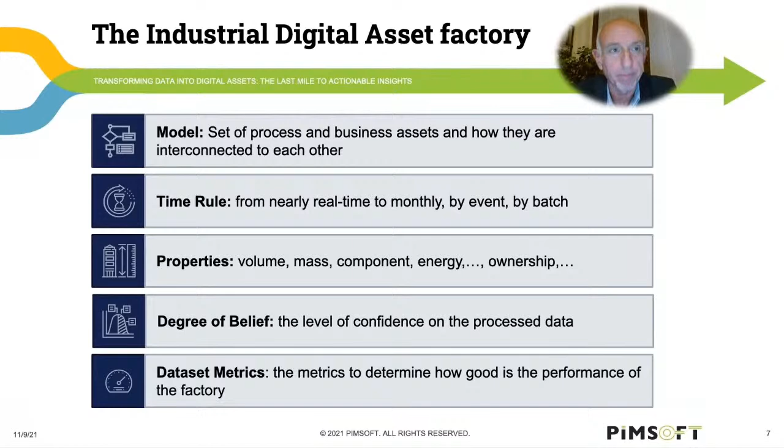Such metrics are defining how good is the performance of the factory itself. Our factory performs a set of dataset operations which transform raw data into a trustable industrial dataset.

Some of those operations are quite simple and intuitive, like filtering the data or identifying gross errors or validating the data against certain rules and criteria.

Then we would like to implement certain rules to substitute bad data with alternate values using design data or using historical data. The resultant dataset will then be reconciled according to the physical constraint based on the selected properties.

We may want to reconcile based on mass or energy, and we may want to apply such constraint to different envelopes. And the result of data reconciliation will be to obtain a first dataset closing the balance across the envelopes we selected.

Thanks to data reconciliation, we can even infer data it was not possible to measure because of lack of instrumentation on the field.

And finally, based on the reconciled dataset, we may want to apply tracking capabilities to track properties like composition or, as we said, ownership. The execution of the data transformation steps around the model generates over time the sequence of industrial datasets together with their metrics.

This is what has been defined as the single version of the truth, but we prefer to refer to it as the system of record of the company, embedding the accurate description of the properties related to the company assets over time.

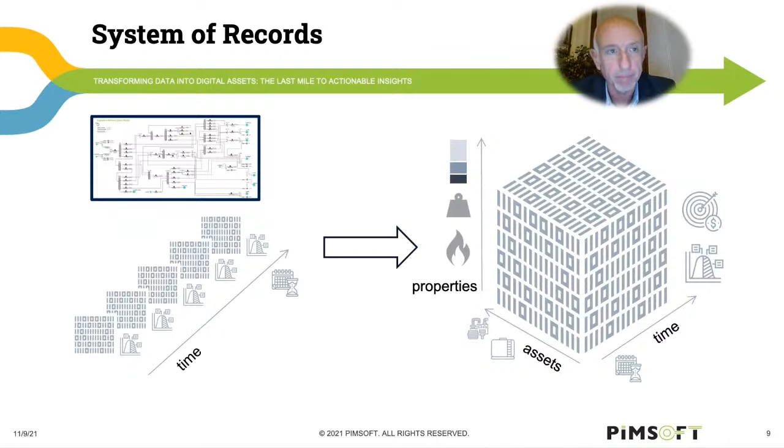The last step of the data transformation journey is about shaping data. Most consumers will not be able to digest the dataset as it is, so our factory needs to be able to shape and augment the dataset in order to be consumed by different actors.

Many scenarios see Sigmafine feeding finance with generated production and consumption data to move ERP stocks, sending reconciled yield vectors back to the planning and scheduling department, preparing compliance reports for tax and environmental authorities, and reshaping the dataset in order to feed the advanced analytics and machine learning layer with trustable data for better prediction.

In all cases, it is extremely relevant to provide the metrics certifying that the dataset we are delivering is good enough to be considered trustable.

Being able to measure the industrial dataset means to be able to certify the reliability of the data delivered to the different consumers. It is also a means to keep our digital asset factory under control.

Sigmafine produces a certain set of indicators, some of them at model level, others related to the points of measurement and the points of balance within the model itself.

They are segmenting the performance of the factory across different perspectives, like redundancy, correction, tolerance, solvability. We would like to take the opportunity to encourage the Sigmafine community to use those indicators more and more.

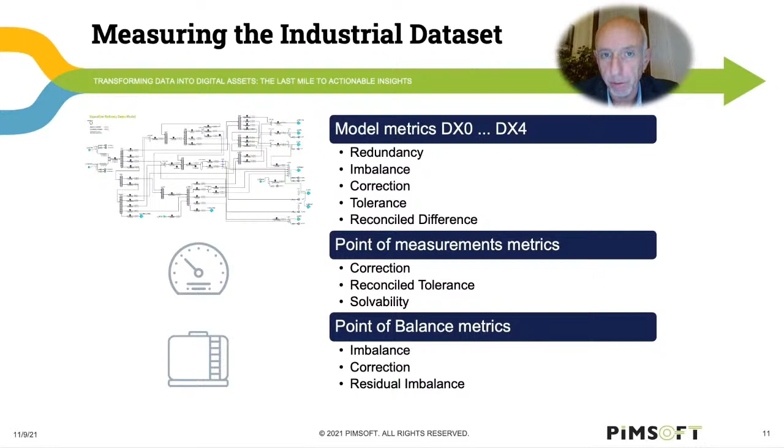As we'll see, these metrics are the ones you can use to build the trust between the factory and the dataset consumers and within the factory itself.

The first example of usage of model metrics is from MOL. MOL is an integrated oil and gas corporation. They are tracking and historicizing the Sigmafine generated model metrics to their PI system.

In such a way, they can track historical performance of their industrial dataset factory, and they can assess how modification to the model or improvement in the measurement system can impact the performance of the model itself.

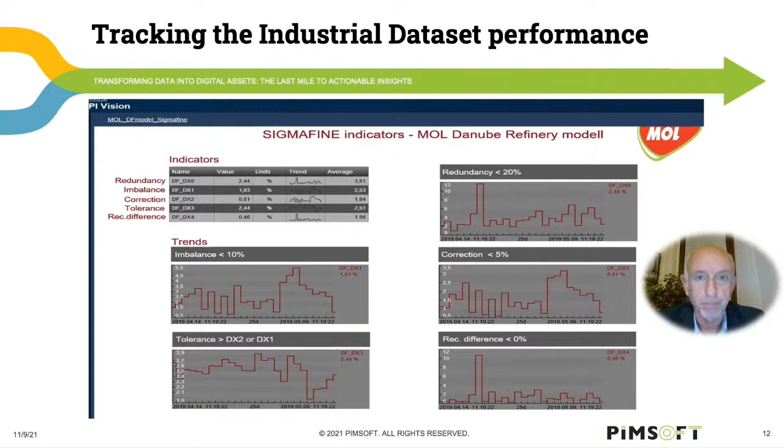So we have discussed how to manage and measure industrial digital assets. Now we'll go through monetization.

Infonomics defines monetization according to two main categories, indirect and direct. Indirect monetization refers to the internal usage of digital assets in order to drive better business, process, and organizational decision-making, which ultimately drive better economics.

This could be the case of advanced analytics optimizing certain production processes based on reliable datasets. Direct monetization instead refers to the exchange of digital assets with external entity consumers, with the objective to obtain an economic return or to avoid a financial loss.

But let's map this concept to the industrial digital asset context. With regards to external monetization, we have several cases where Sigmafine-generated datasets are used in the relationship with third parties.

This is done, for example, in compliance, whenever validated datasets are required by tax and environmental authorities. In joint venture, instead, it is required to allocate consumption and production among the different players of the joint venture. So this is the case where ownership tracking is used.

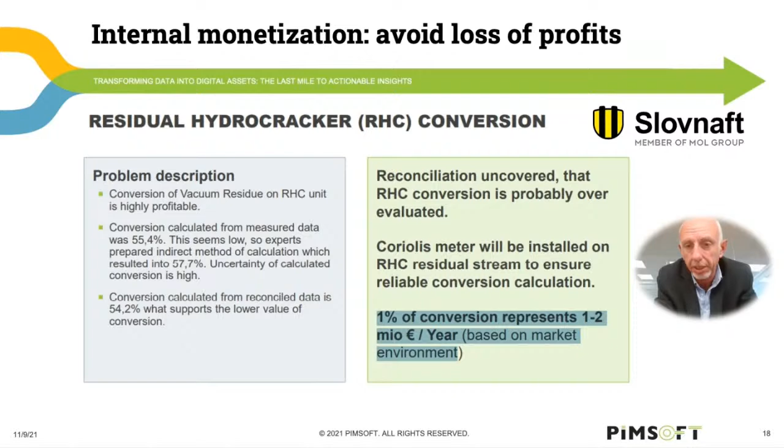And this is a clear case of Sigmafine having helped the company avoid a continuous loss of profit, because 1% of conversion calculated based on the market price would mean 1-2 million per year for the refinery.

We went through the process of managing, measuring, and monetizing industrial digital assets. At Pimsoft, we believe SigmafineHub is the foundation to elevate such process to be a well-controlled industrial dataset factory.

Among the different system capabilities added by SigmafineHub, I would like to underline the ones I believe are the most impacting. First of all, SigmafineHub introduces the capability to augment the knowledge of the system itself. It is possible, therefore, to add specific rules and behaviors to build a shared company data management practice.

Second, we learn from our customer that

Ryan, I guess that the video ended before the end, so we missed a few slides.

So, while Ryan is trying to recover this, let's continue the discussion. I think you're making the point that today everybody is looking for advanced analytics, but at the same time, they're suffering from a lack of organization and data quality. How do you position Sigmafine and the role of Pimsoft and its partners in that journey of our customers?

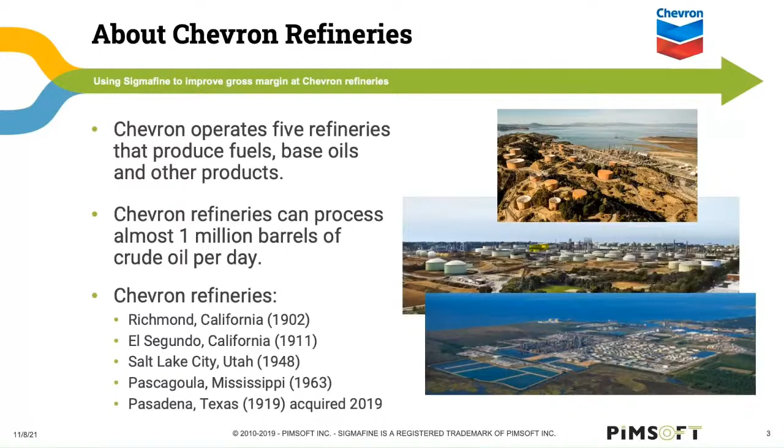Our first refinery was built in Richmond, California in 1902. Our second in El Segundo, California in 1911. In 1948, we built the Salt Lake City, Utah refinery. In 1963, the Pascagoula refinery was built, and that is currently Chevron's largest refinery in the U.S. Then recently, we acquired in 2019 the Pasadena refinery in Texas, originally built in 1919.

So Chevron's journey with Sigmafine started over 20 years ago. Prior to 2010, we had various independent projects. In Pascagoula around 2001, we initiated the Rambo project, which was the Refinery Accounting Mass Balance Optimization project. It was our initial Sigmafine deployment for Chevron. It also included implementation of the OSI products, the PI System and ProcessBook. Those were all installed, and the focus there was to replace our legacy inventory and yield accounting systems.

Later on in 2008, in El Segundo, we upgraded to Sigmafine 4.5. And then we also developed some software that served as the front end to Sigmafine. We called it Promise, which is Process Monitoring Information System. And then at the time, we had Pembroke Refinery in the United Kingdom. They had Aspen's Advisor that they were using for mass balance.

Then in 2011, we had the Global Manufacturing Mass Balance Project. This expanded the use of Sigmafine to all of the equity refineries. We started doing daily mass balances.

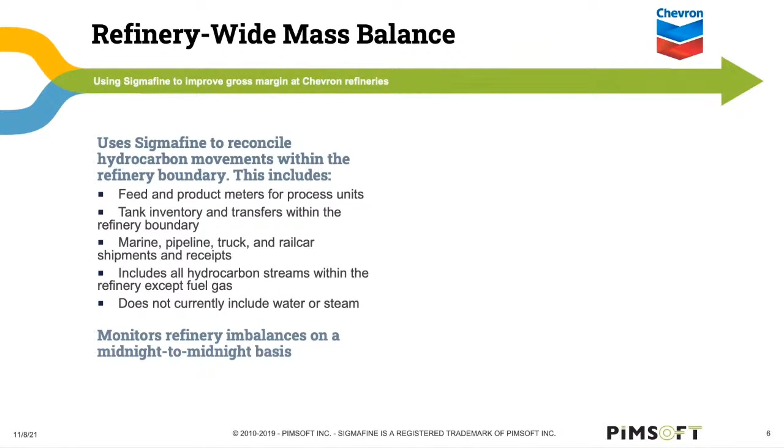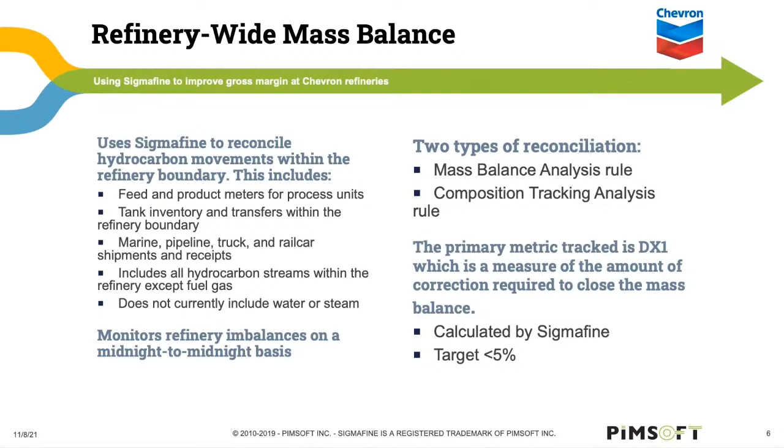We're monitoring refinery imbalances on a midnight to midnight basis, and we perform two types of reconciliation: the mass balance analysis rule, and composition tracking analysis for our crude tanks. The primary metric we track day-to-day is the DX1, which is calculated by Sigmafine, and we target less than 5% on a daily basis.

I wanted to talk to you about two of the projects currently in flight within Chevron: the Oils Movement Program and the Gross Margin Improvement Project. I'll start with the Oils Movement Program. I talked a little bit about this a couple of years ago at the Sigmafine Summit. The program is a collection of projects that include six work streams.

The first is tank field management, which covers internal refinery movements. Secondly is the marine movement and scheduling, which includes dock management and dock scheduling. The next work stream is rail and truck movements. We also looked at meter flow compensation, and then production accounting and mass balance.

The goal of the Oils Movement Program is to replace our obsolete marine scheduling, oils movement, mass balance, and production accounting systems. It's actually part of our digital transformation. The goal was to provide an integrated set of standard systems to meet all of our functional requirements while reducing the cost of ownership by using sustainable vendor solutions.

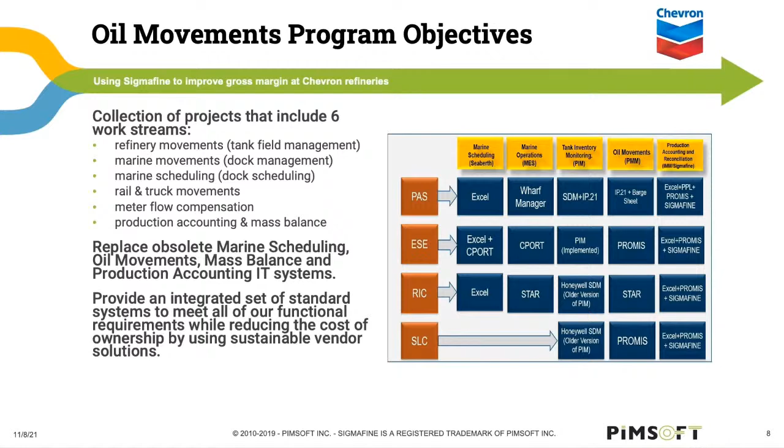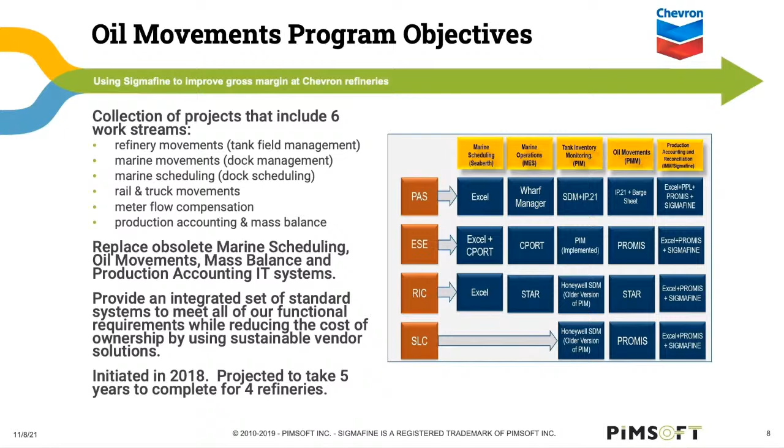As you can see in the diagram to the right, we had a variety of different applications at each site. We were using a collection of Excel spreadsheets and different applications from one site to the other, and some applications didn't integrate with other applications. So Oils Movement was really all about standardizing the applications and picking ones that would communicate well with one another, and that we had dependable vendors who could support those solutions.

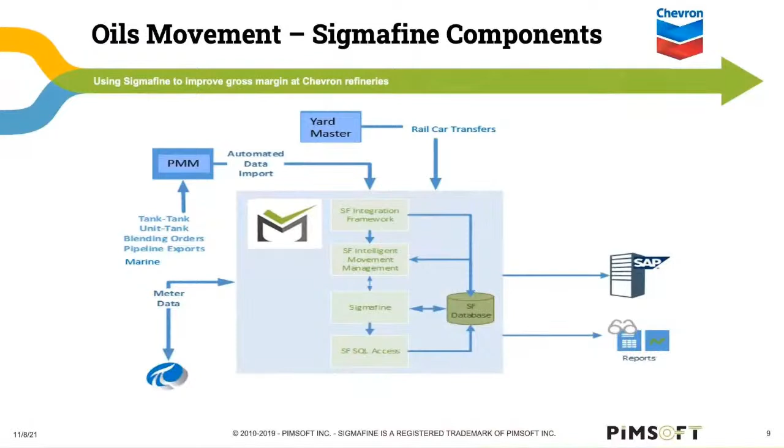Under the Oils Movement Program, as we started to study our infrastructure, we realized we were going to need a few more applications to fill the gap that PROMIS was going to leave when we decommissioned it. So a couple things we picked up: one was the Sigmafine integration framework, which we needed to connect to a variety of source systems, like Yardmaster for the rail cars. We had the Honeywell Profit Movements Management that was giving us all of our tank-to-tank, unit-tank, blending, pipeline and marine movements. That connects with MES to give the marine movements.

We also have our meter data coming in, and we're looking at an SAP integration to pull some truck information down from SAP. All of that is processed through the Sigmafine integration framework.

We are using at least a portion of the Intelligent Movement Management software to provide a tank calculator. Several of our users just needed to quickly calculate a volume from a gauge reading, so we put this in, using parts of Intelligent Movement Management to give them a web-based application to do a tank calculator.

And then through the integration framework, we were running our Sigmafine models. Under Oils Movement, we did have to update our models because they didn't have everything in there that was needed to produce a refinery stock balance for finance.

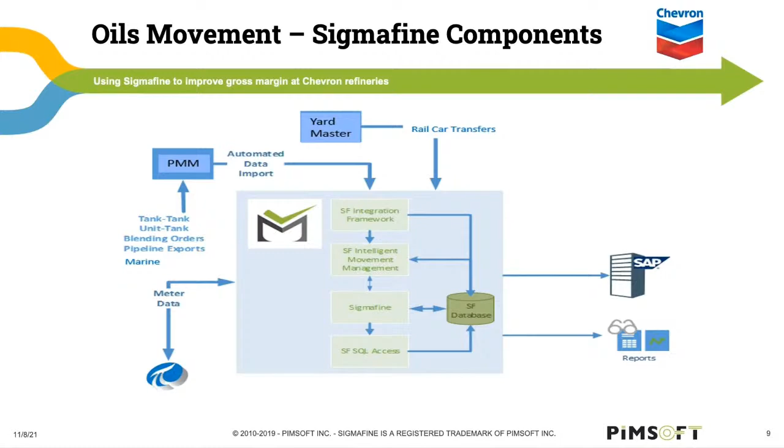On the back end, we needed to be able to report the results, so we needed the Sigmafine SQL access. We're writing to PI and to SQL using the Sigmafine SQL access. The information we write to PI is the reconciled mass and volume that comes out of the model, and everything in the model, including the tables and everything, goes into the SQL database, available for external reports.

We also have a backend integration for SAP. We needed to be able to send the monthly production numbers to SAP for gross margin calculations. The second project I wanted to talk about today is the Gross Margin Improvement Project.

This project was initiated in late 2019. However, due to the pandemic, much of the work had to be completed remotely. Although it was timed right, as a result of the pandemic lockdowns, the demand for refined products fell sharply, which led to negative margins for much of 2020.

In addition to that, Chevron cut nearly 15% of our workforce, so we had to learn quickly how to better utilize our resources and our technology. Gross margin was key to that. The objective was to move lagging and average processes to industry best practice so we could unlock additional gross margin at our refineries. There were two focus areas: planning improvement and performance monitoring.

Within the planning improvement section, we looked at feedstock selection, AOP, which is our annual operating plan, and price forecasting. Then under performance monitoring, we looked at material balance and monitoring, backcasting, and constraint management.

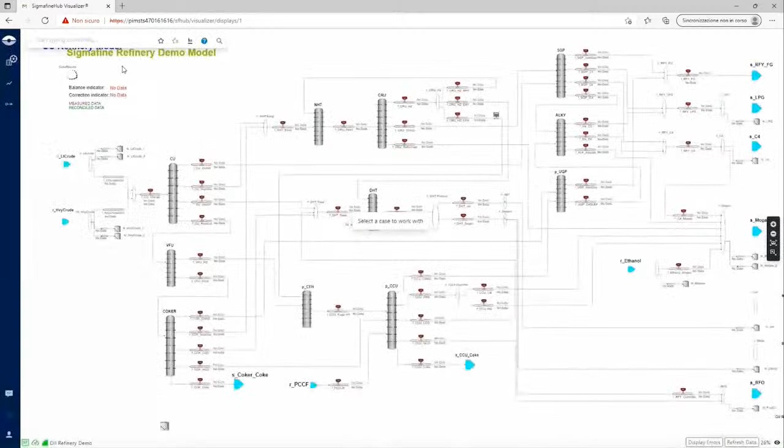With this demo, I'm going to show you some situations where the Sigmafine Studio web app really improves the way you look at your Sigmafine dataset. First of all, you can see that Sigmafine Studio is fully integrating the SigmafineHub, and results are accessible by other SigmafineHub web apps like Visualizer.

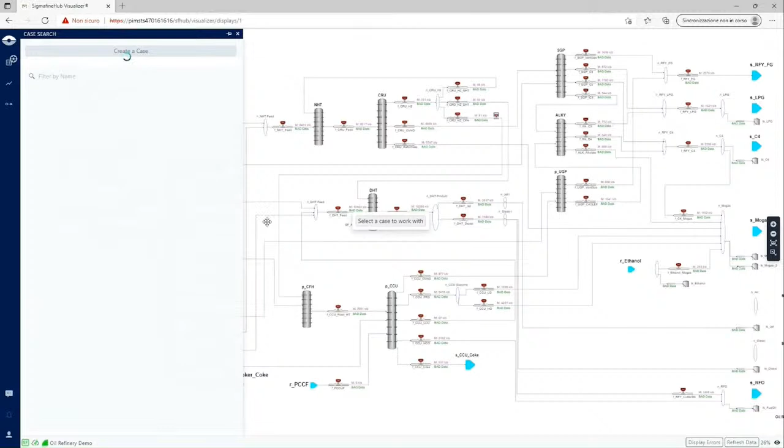So you can go with your daily Sigmafine activities, such as opening the display, selecting the case, and start analyzing the data. It is not new that Sigmafine provides a set of statistical indicators that helps you in analyzing your data for the diagnostic. But then you have to dedicate some time in realizing where the issue is, which data is missing, and most important, how to solve it.

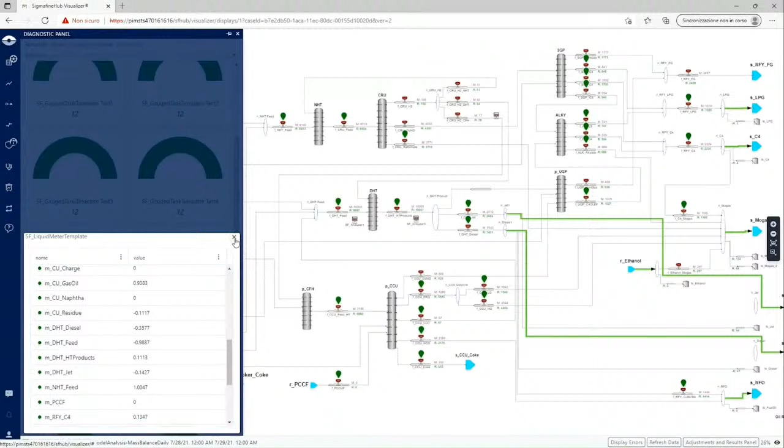Thanks to the Sigmafine Studio web app, you now have the power to develop some logic through the usage of the Studio Analytic that supports your manual routines during all the process of data validation.

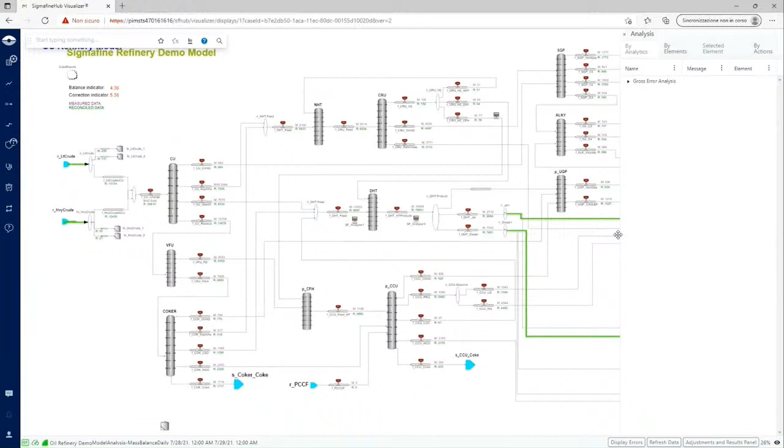Let's consider a very common situation that I'm pretty sure can sound familiar to you. It may happen that some measurements in your site, for many reasons, return 0 or bad data. Now, imagine how useful it can be to have an analytic that returns the list of these measurements along your model in a sort of interactive summary table, and then make a comparison with their values in the previous case, with no need to spend time closing the current case, opening the previous one, and manually searching for the values you are interested in.

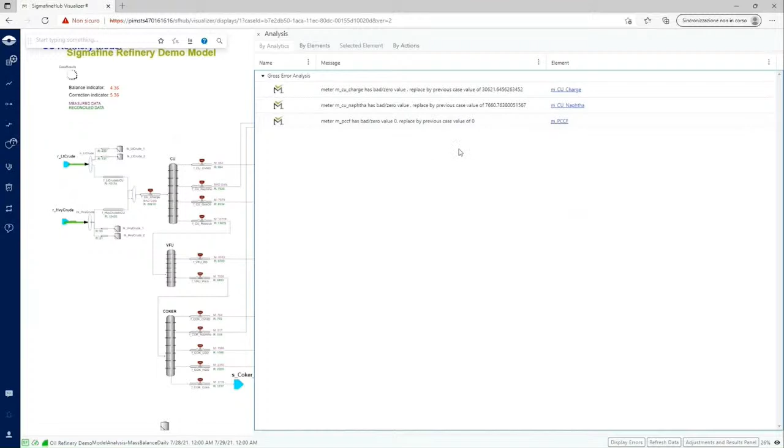Also, it would be incredibly advantageous to have some suggestions on the possible actions to take in order to solve the situation, for example by adjusting the current value with the previous. And you can easily decide which actions to apply or not.

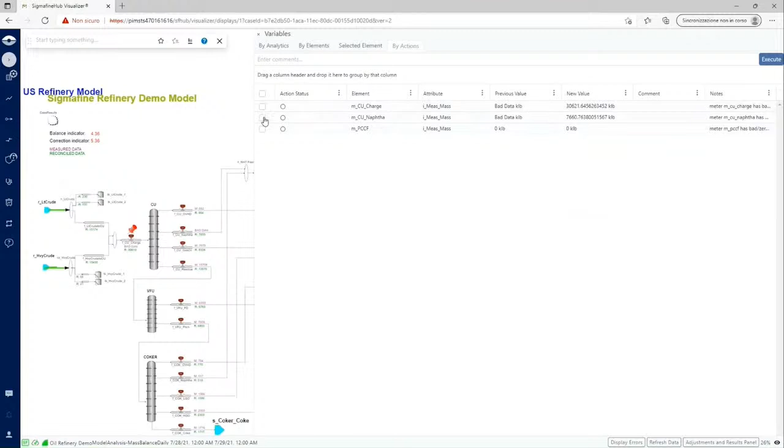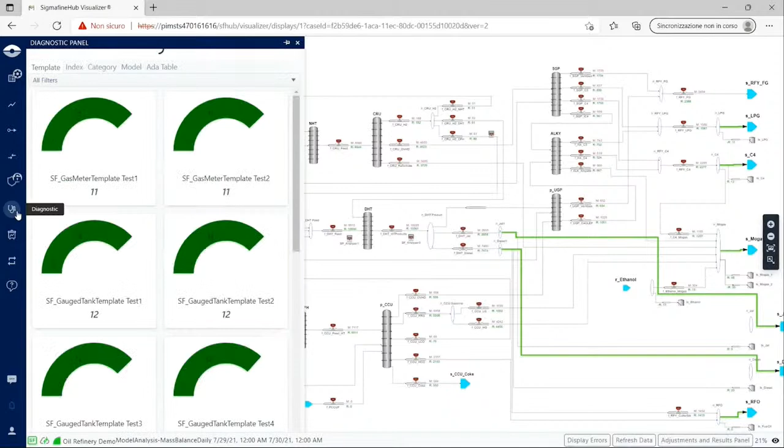Another common situation happens when you are analyzing your dataset and you notice a node, a tank, or process unit with a huge imbalance. You can start analyzing your data using the diagnostic panel inside the SigmafineHub, and here you have the overview of all the statistical indicators. You can see that there is already something related to the ethanol receipt area.

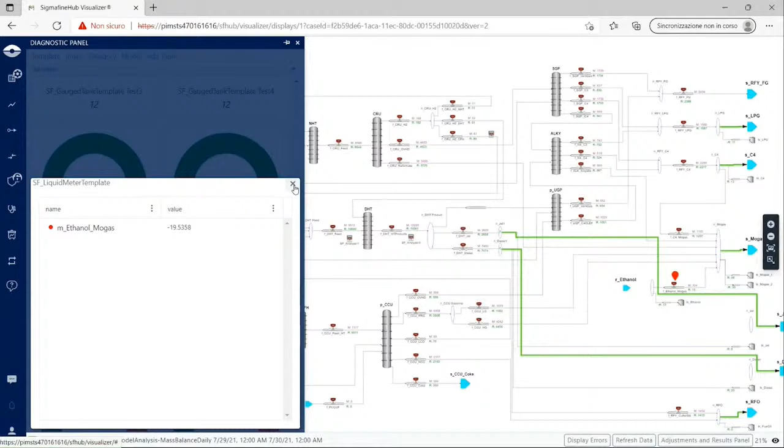The meter has a Test 1 value very high. This means that the correction applied by Sigmafine to the measured mass is very high with respect to the tolerance that you assign to your meter. As well, you can see the node has a Test 3 very high, together with Test 4. These two indicators inform the users that maybe there is a problem in this area.

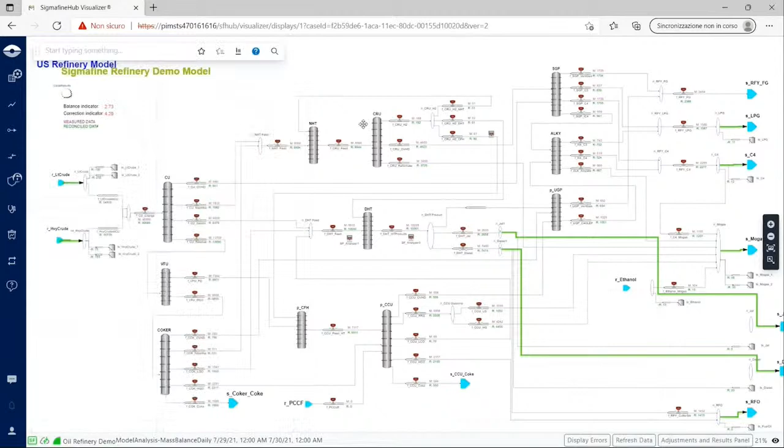With the SigmafineHub, you can easily identify imbalance points along your model, and you can also associate some suggestions.

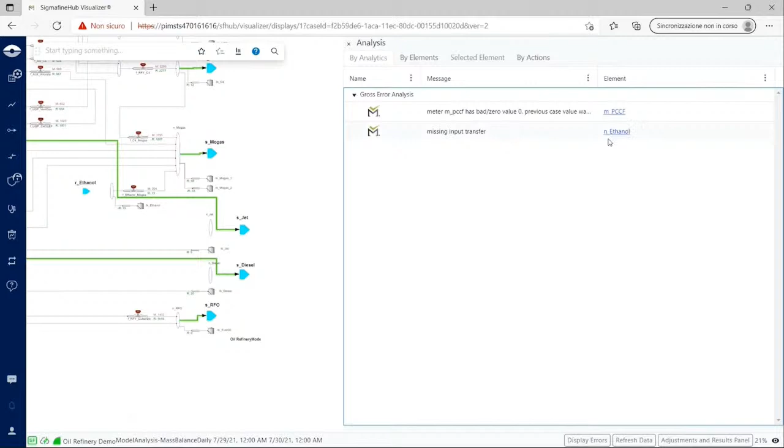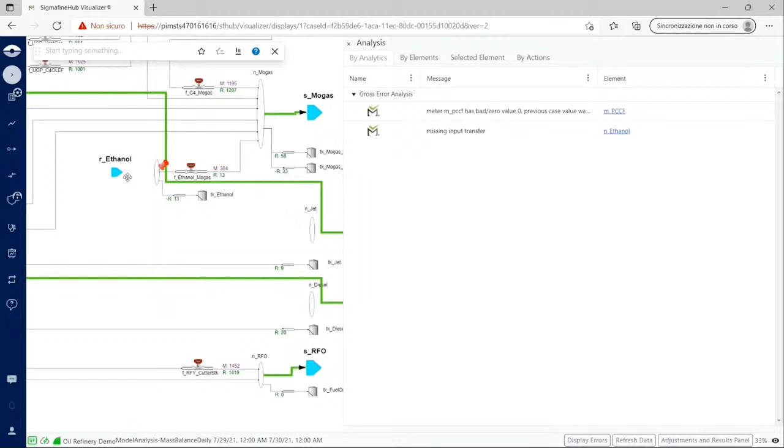So it tells you the node is imbalanced, and it also tells you that there is probably a missing input transfer. When you analyze the area, you notice that a transfer is missing from the receive point to the node. This information can significantly reduce the time you spend identifying the problem and the solution to adopt.

If you click, you can create your missing transfer, putting the source and destination. You can even add some attributes if you want, or just create it. Here it is, the new transfer is now available in the model. And now you can run your case again.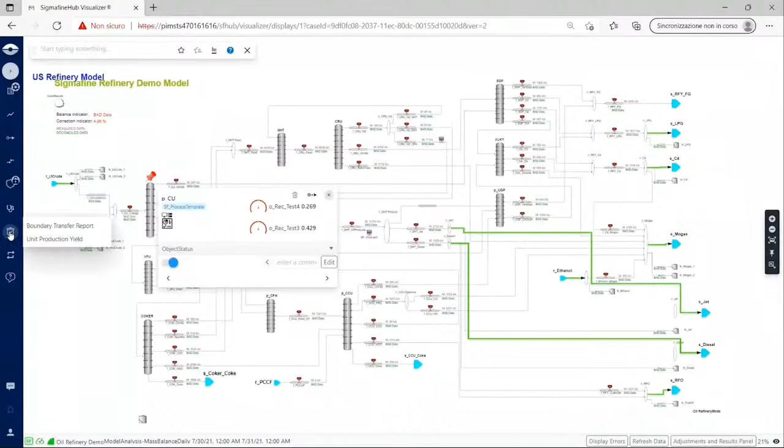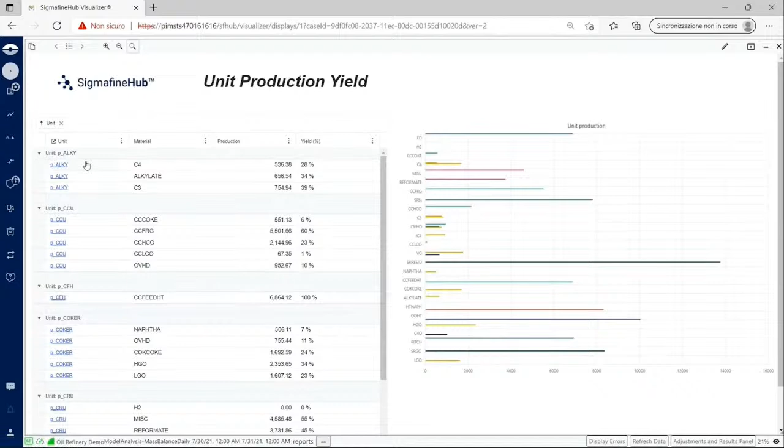In both tabular and graphical view, you can investigate the production yield per each unit simply by dragging and dropping the unit column, so you can see the material produced in terms of amount, quantity, and yield percentage, as well as the overall production per material in the graph, together with the process unit where it came from.

For example, you can easily check that the overhead production is done by three different process units with their respective quantities. You can access the same information from here by grouping by material and searching for the material you're interested in.

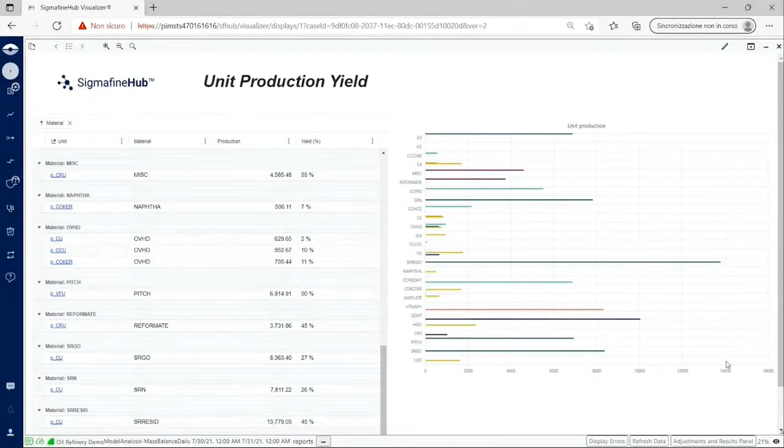Furthermore, you can decide to go into more detail for a single unit, select your desired unit, and then open a more detailed view.

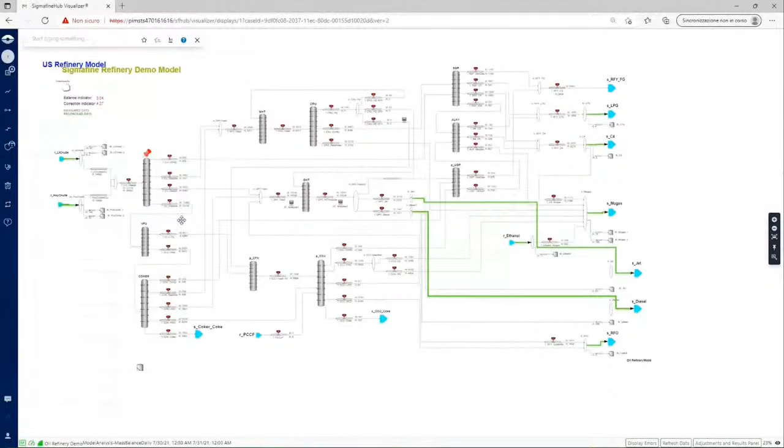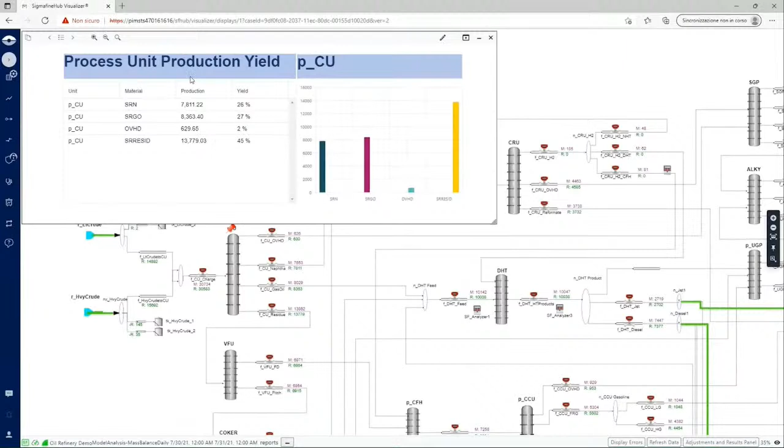If you want more detail on unit production yield, you can select the unit you're interested in and access the same information, but filtered only for that unit, so you can see in graphical and tabular view the yield of the crude unit, referring to the material produced by the unit, their quantity, and their yield in percentage.

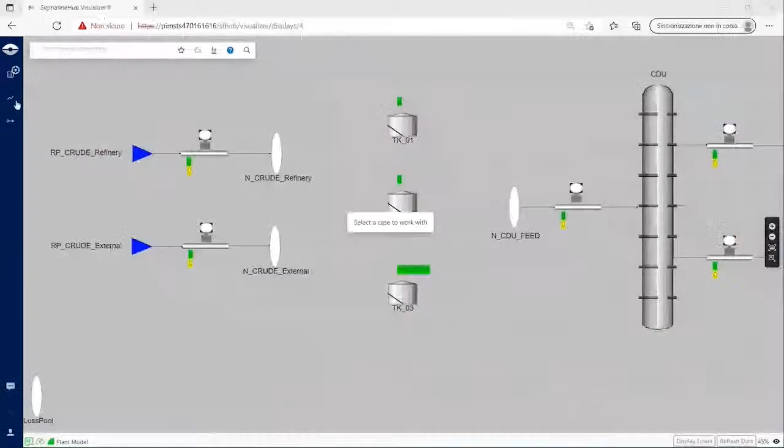Until now, I showed you examples for balance analysis. But the Sigmafine Studio supports even more advanced calculations. For instance, consider a composition tracking analysis that calculates the material composition of tanks, flows, and transfers based on their initial composition and the movements that happen during the analysis time frame.

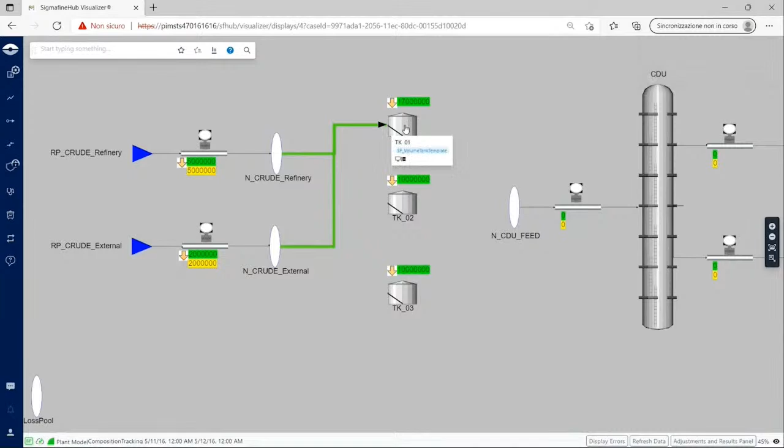Thanks to the Sigmafine Studio, you can create an effective way to visualize and analyze the composition data of an element, for example this tank, together with the material balance data within the same interactive dashboard, giving a complete overview of both balance and material composition, in terms of what enters the tank, the input transfers, and the material detail.

At the end, you can access all this information, and the composition tracking table results are visualized through a pie graph that updates according to the selected elements. For example, this movement entering the tank is made 100% of West Texas Sour. By clicking on the tank, you can access the composition tracking results table of the tank, and the pie graph is useful because any unexpected material will jump to the eye.

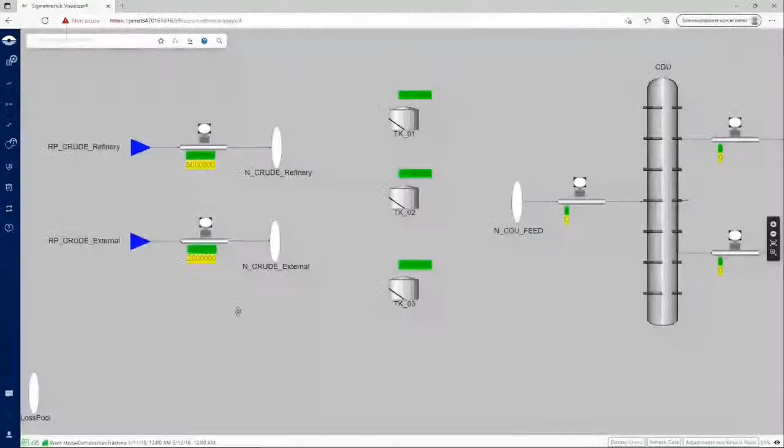You can also have a complete overview of all the materials stored in your model based on the composition tracking results.

You can see the material summary report that shows you in both tabular and graphical way. You can visualize all the material summary that you have with their respective quantity, the total amount that you have in the model, or also can be very useful to see the details of the materials by tank.

Tank 1, for example, is made of 3 materials: Arab Superlight, West Texas Sour, and West Texas Intermediate. In one click, you can visualize directly their quantity, respectively, with no need to select the attribute and expand the table of composition tracking results. Everything is directly reported here in the same SigmafineHub environment.

And finally, at the end, you can have the detail per each tank of the materials that you have stored. This is an interactive dashboard. As you can see, by clicking here, it tells you the same information in graphical view, and it automatically updates, giving you the data that you want to see.

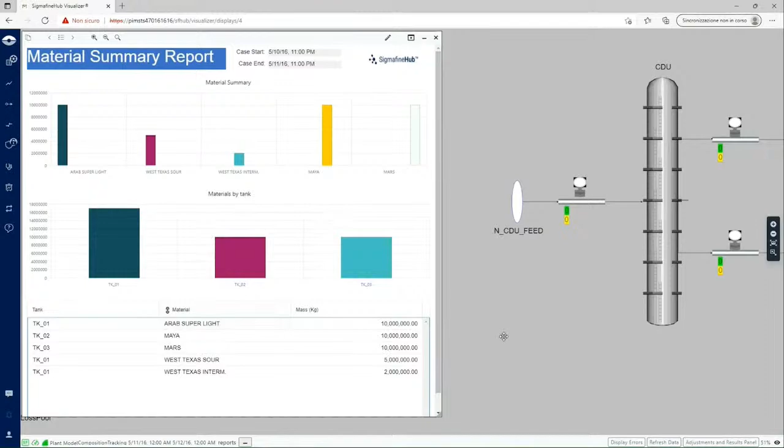It's really amazing what Sigmafine Studio is enabling. Elena showed us analytics that help users not only to root cause the problem, but even propose solutions. Interactive reports that provide insights on the assets and on the overall balance envelope. Dashboards that interpret complex datasets, such as contextualize the results of composition tracking. And everything available at your fingertips without stepping out of the visualizer so that you can immediately take actions. And that is really awesome.

But there is more. I'm pretty sure, whilst looking at the demo, that in your mind you were already thinking about what you could do if Studio were available in your Sigmafine environment right now.

Well, you could say, I could create the refinery loss report. I could see all the metal grades of each stockpile all at once. I could compare in one table the LNG production of all my trains. I could put intelligence to pre-validate the reconciliation before Sigmafine users even reach the office. You could really do cool things without stepping out of Sigmafine.

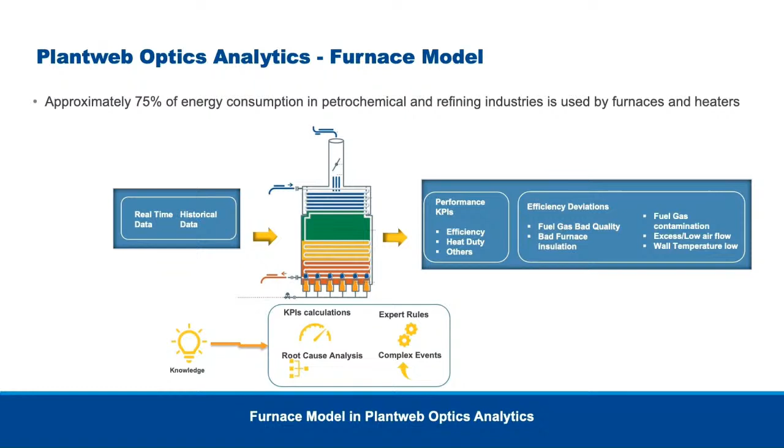In this use case, we worked on a fired heater. We made a model for it, which embeds years of expertise and process knowledge to preemptively alert operators about possible problems and prevent costly shutdowns. This model embedded performance calculations too, to identify performance targets and recurrent problems, and root cause analysis to help find and mitigate the impact of deviations.

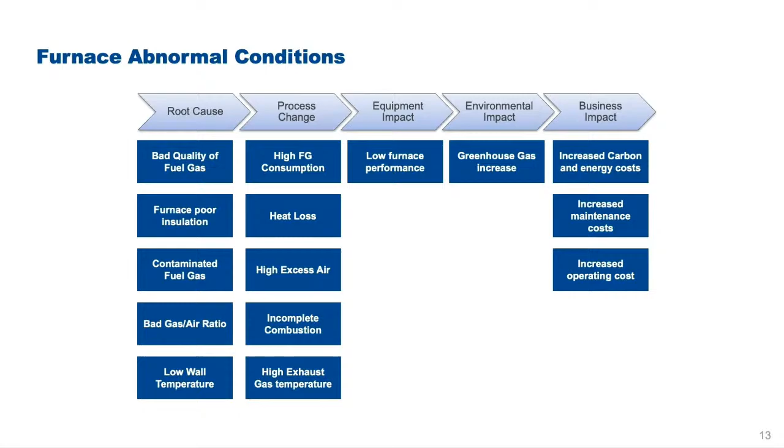As part of the model, we identified root causes for abnormal asset behavior. Also, we identified their impact on the equipment, environment, and business. The detection of abnormal behavior is mainly based on the raw data.

There are some challenges with the raw data that could be divided into two categories. The first one is measurement error. The measured data may be lost, contaminated by gross error, or distorted by random signals during the measurement process. So the final data displayed to the end user might deviate from the original data, which might affect decision making.

The second challenge is the lack of data. Sometimes we don't have enough instruments to generate the right KPI in the model, which might be caused by missing instruments on the field, and that needs to be compensated by estimation or process modeling. These two challenges may lead to wrong decisions.

The solution is to generate trustable data for the analysis through data reconciliation. This will bring considerable benefits like data correction, easier detection of measurement problems, and making effective decisions.

We partnered with Sigmafine because it increases confidence of what we measure and estimates what we don't measure, which helps us make better business decisions.

This is what we get when we integrate Sigmafine with our model. Now the raw data is flowing through Sigmafine and then fed into Optics Analytics model, which will deliver enhanced results, enabling the user to identify deviation from optimal mass balance, identify the cause of underperformance, and work toward corrective actions.

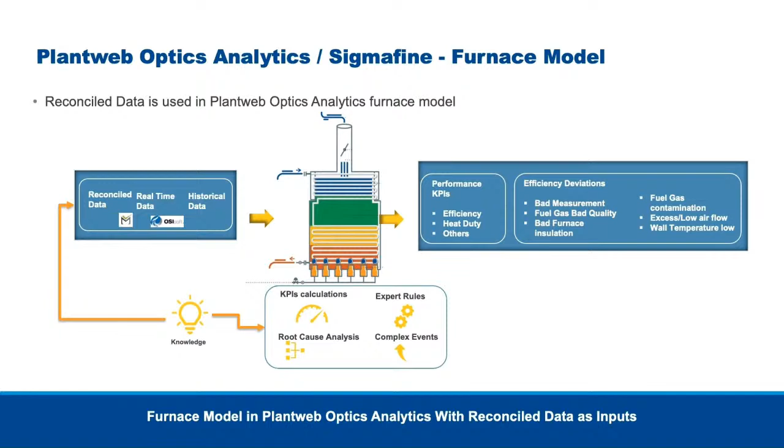So to start building the combined solution, we follow these steps. The first one is to create the model in Sigmafine. We start by building the furnace model, reconcile the data, and then estimate and measure its parameters.

Sigmafine uses the data reconciliation method, which uses a least squares formulation to quantify the error in the model measurements. Here we developed the furnace model in Sigmafine, which is empowered by a thermodynamics extension to do the hourly integrated mass and energy balance of the furnace.

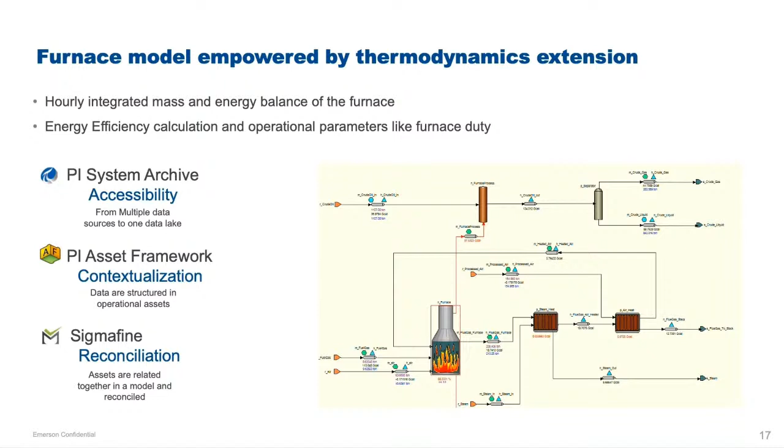Basically, we are reading the raw data from the PI data archive. The data were structured in operational assets with PI Asset Framework. After that, these assets are related together in a model and reconciled with the Sigmafine server.

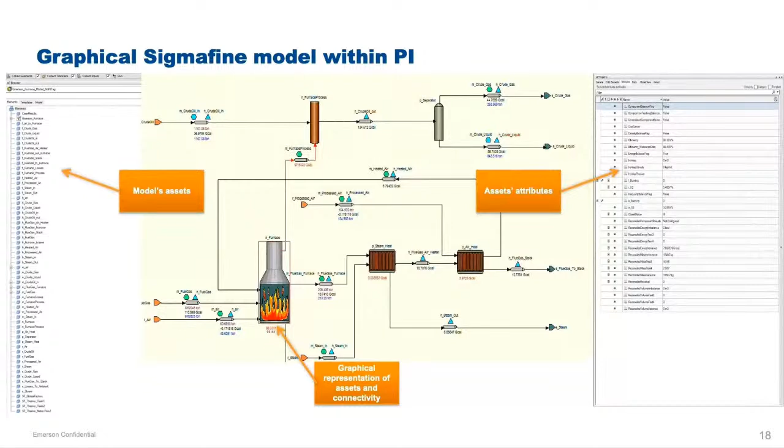So this is the Sigmafine furnace model. Each asset is represented by a standard Sigmafine template, which is represented in a modular display.

Now we will do the data mapping and integration between Sigmafine and Optics Analytics. Once we have generated the reconciled data, we identified the data we need from Sigmafine in the analytics model, and we mapped this data to the KPIs that we need to generate in analytics.

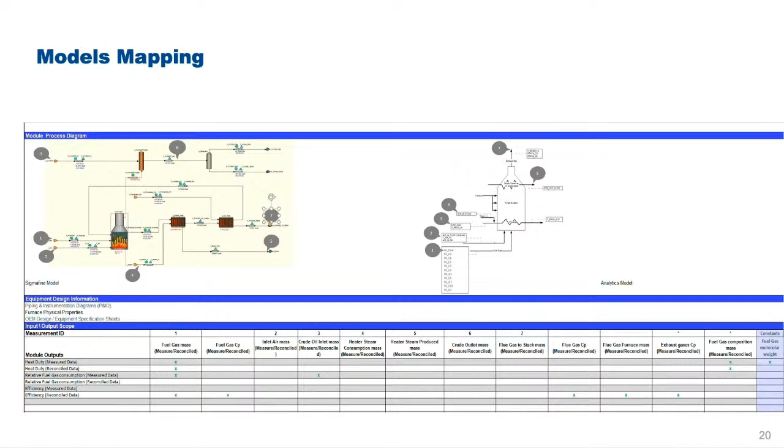Then, in order to integrate the two components, Sigmafine generates the reconciled data and publishes it to the Pi server. Then analytics connects to the Pi server and reads the reconciled data from there to generate KPIs.

The combined model is fed by real-time infrastructure with process data, and where required, with laboratory data. It provides seamless integration with the customer infrastructure, able to interface with disparate data sources and data repositories, such as historians, ERPs, and business intelligence tools.

So Sigmafine can either publish the reconciled data to SQL Server or Pi Data Archive server. The connection from Analytics to the SQL Server is very easy and simple. For the connection to the Pi server, we need to install and configure PyBridge to connect to Pi server. Once connected, the Pi variables will be transferred to Analytics as global variables.

Now we will create the model in Analytics. We started by adding a class. This class will embed calculations to calculate the asset performance.

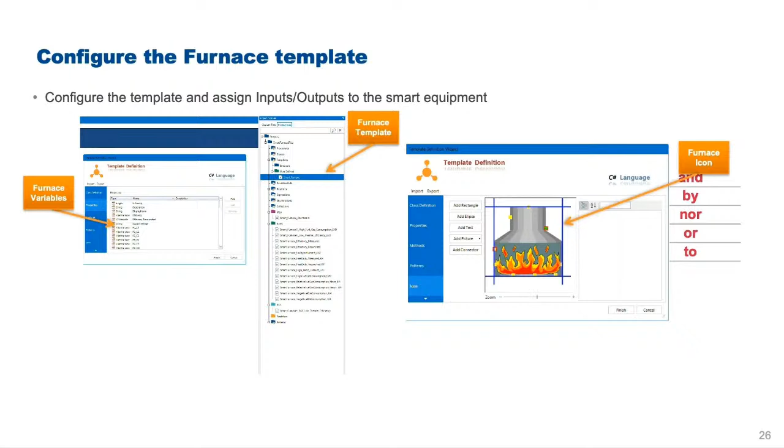This template determines KPIs and metrics. Then it compares the calculation to a baseline or design values to determine deviations, in order to identify potential instrument problems, pinpoint degradation source, and evaluate the effectiveness of cost improvement actions.

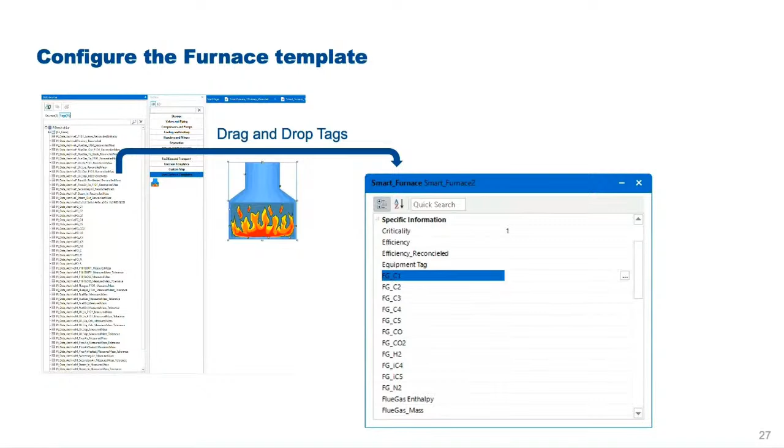The asset includes a set of properties, where each property is assigned to a tag from Sigmafine for the reconciled data, or from Pi for the raw data.

Now we will go to the KPI development. We use custom K rules to compute KPIs like efficiency and heat duty. As you can see, this model uses a graphical environment based on drag, drop, and connect.

After generating KPIs, we compared the calculation to a baseline or design to determine deviations and generate events accordingly. So the event here is generated when a low thermal efficiency is detected.

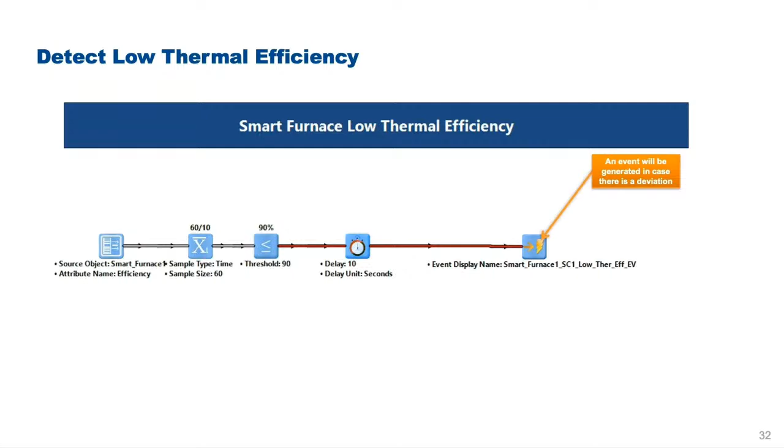Then we build a complex event graphical rule to determine root cause of the deviation. We used the KRCA model in Analytics, which allows creating fault propagation models that are defined by cause and effect relationship. The possible causes of an abnormal condition are located upstream, and the effects are located downstream.

For example, we detected a low thermal efficiency. The cause of this symptom is the instrument bad measurement. Behind this problem box, there is a logic that we define to trigger this problem when it occurs, like we saw previously.

This model provides also actionable knowledge for immediate resolution of performance gaps. These actions are associated with the problem box and displayed in dashboards. For example, a message will be displayed to check the instrument FIT 101. Moreover, using Sigmafine data, we can determine which instrument is causing the issue and which measurements are contributing most to

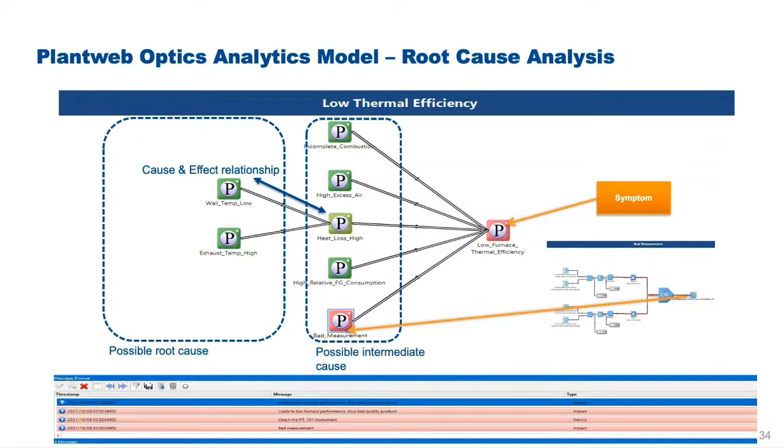the imbalance. In this way, the root cause analysis based on reconciled data can serve several purposes. First, it acts as an early warning system for instrument malfunctioning or drifting out of calibration. Second, it acts as an online validation process where the performance of individual instruments can be compared for consistency against the rest of the measurements in the system.

We can have more details about the low furnace performance by going into this icon. The low furnace efficiency symptom is associated with the bad measurement provided by instrument FIT 101.

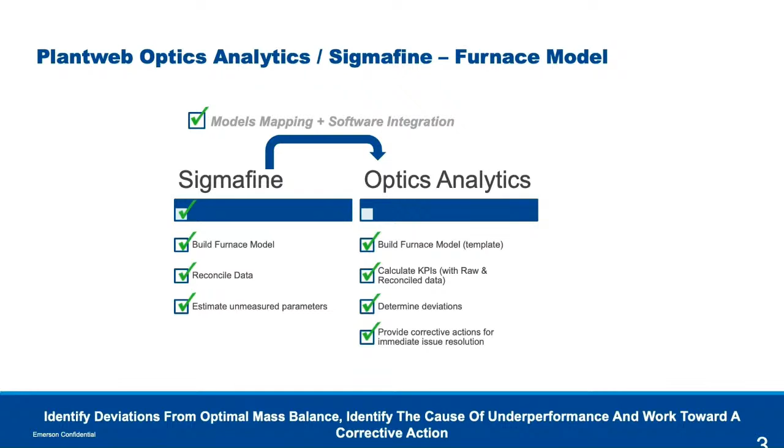So this is the summary overview with drill down capabilities. We were able to estimate the unmeasured data like flue gas to stack and the vaporized crude. Then we were able to calculate the KPIs based on raw data and reconciled data. Then with the root cause analysis based on reconciled value, we identified which instrument has potential problem and generated actions for immediate resolution of performance gaps.

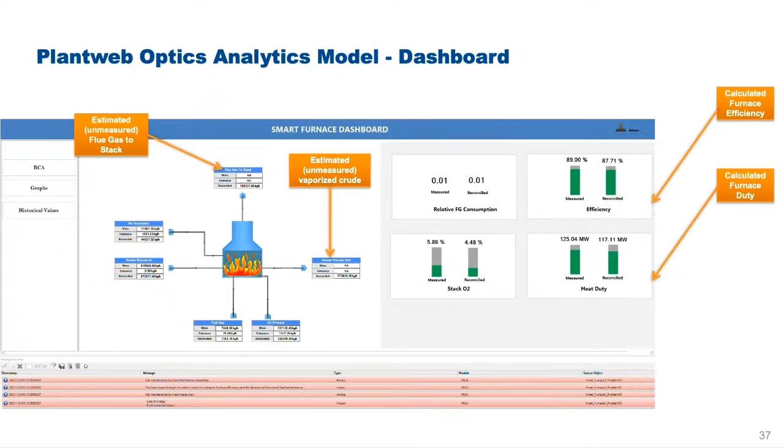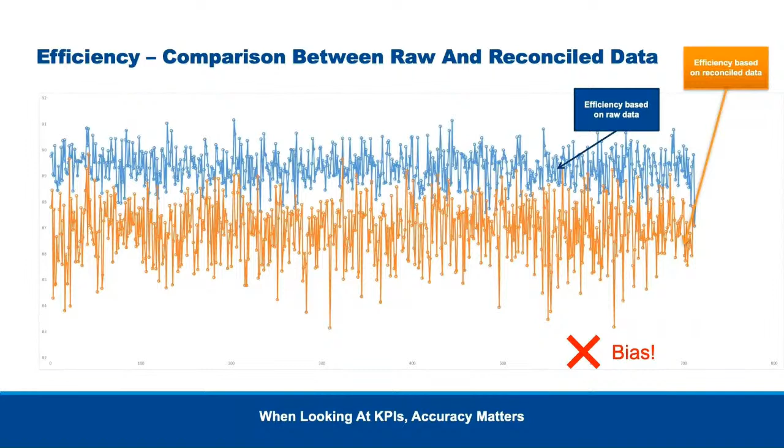This graph is a comparison between thermal efficiency calculations based on raw and reconciled data. As you can see, the efficiency is lower than expected. This bias between the performance indicators with reconciled and raw data is caused by bad measurements.

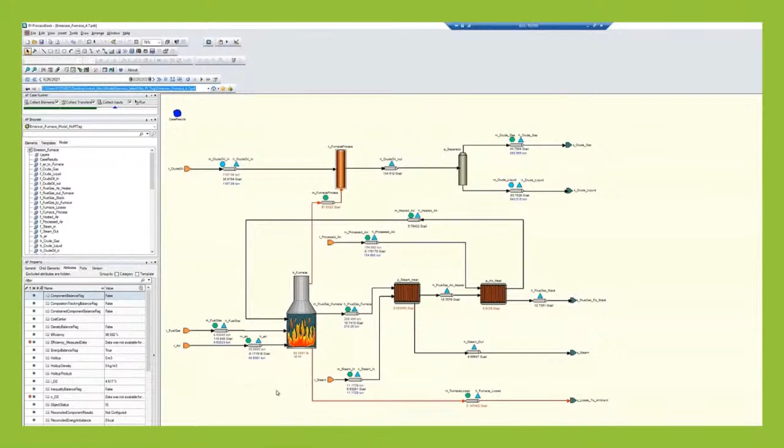As you can see, each asset is associated with an element template, and assets are related together in the model and reconciled. The reconciled data is then archived in the PI server.

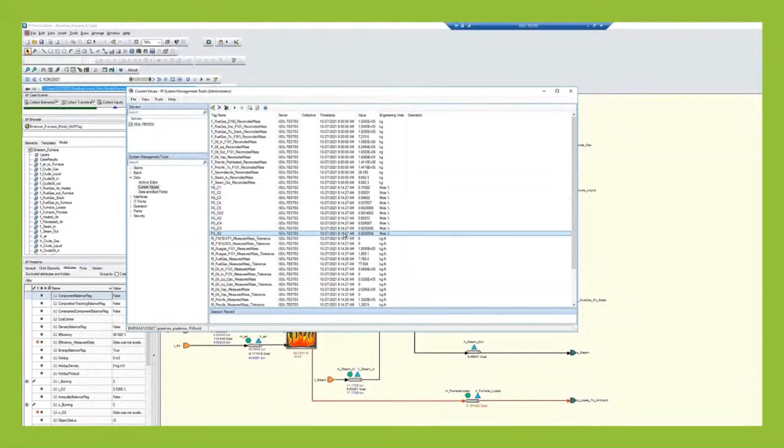This is the PI System Management tool that we can use to visualize the current value in the PI data archive of the reconciled data from Sigmafine. This data will feed then our analytics model.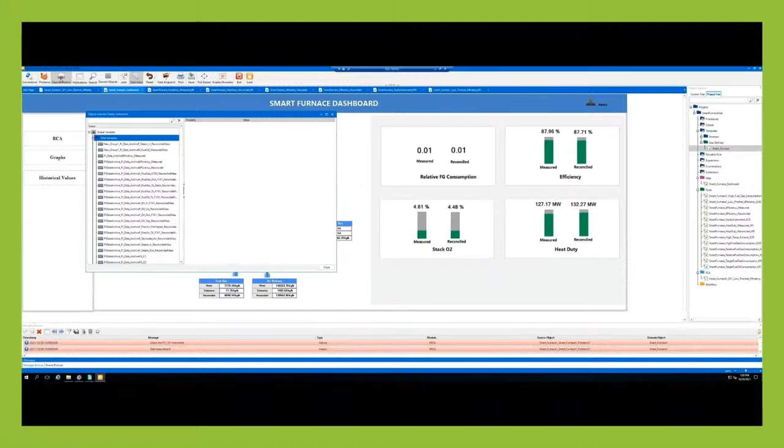From the object watcher, we can check the variable status and values in the system. This asset is a user-defined template, which has properties, and each property is associated with a variable that we are reading from the PI server.

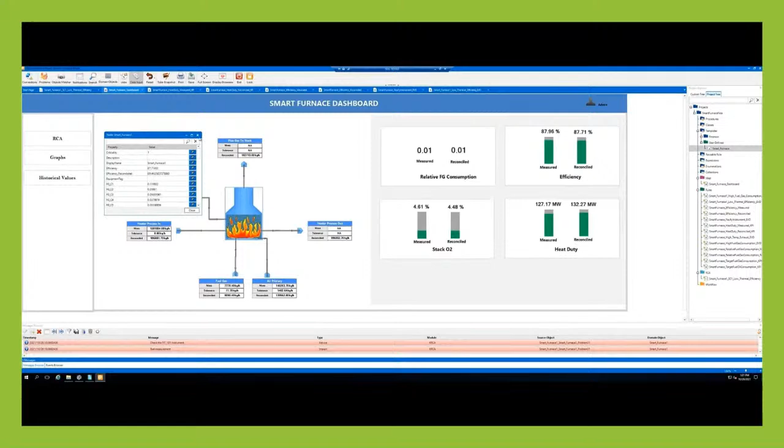After defining the model properties, we calculate the KPIs like the efficiency and the heat duty. We used for that the K rules, which has a rich toolbox including arithmetic, statistic, temporal reasoning, and logic blocks that can be combined all in one rule.

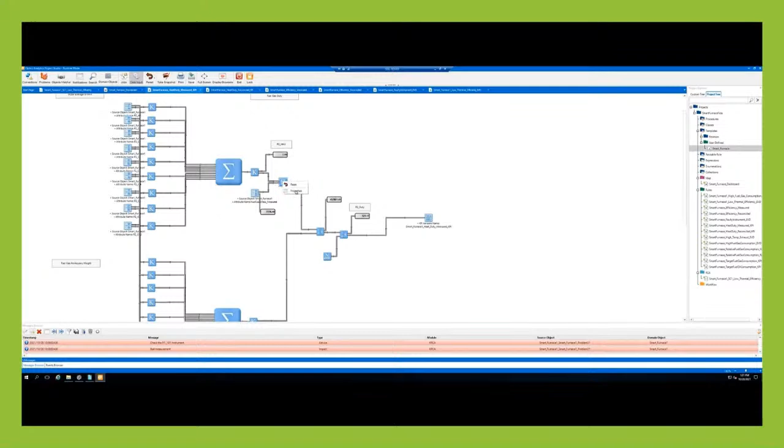For example, this block is used to read the fuel gas flow from the furnace model, and this one is used to do an arithmetic operation.

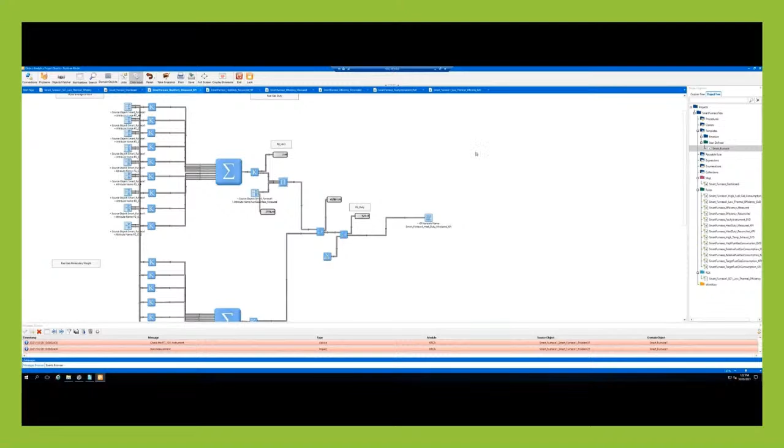After calculating the KPI like the efficiency, we compare its value to baseline or design value to determine deviation and generate events accordingly. So let's take this example. Whenever there is a low thermal efficiency, an event will be generated.

To summarize, the K-rules model was used to calculate KPIs like efficiency and trigger events if any deviation is detected. In the same way, we developed other logic to detect a bad measurement in the process based on the reconciled data, which might affect the thermal efficiency values.

So whenever there is an issue in the measurement, an event will be triggered and communicated to the KRCA trees, in which root causes are identified. Each one of these problem blocks is associated with an event.

We can show here the related events to the bad measurement, for example. To have more details about the problem, we can go to this icon and click Show Tree View. So as you can see, the low furnace thermal efficiency is caused by bad measurement in the instrument FIT 101.

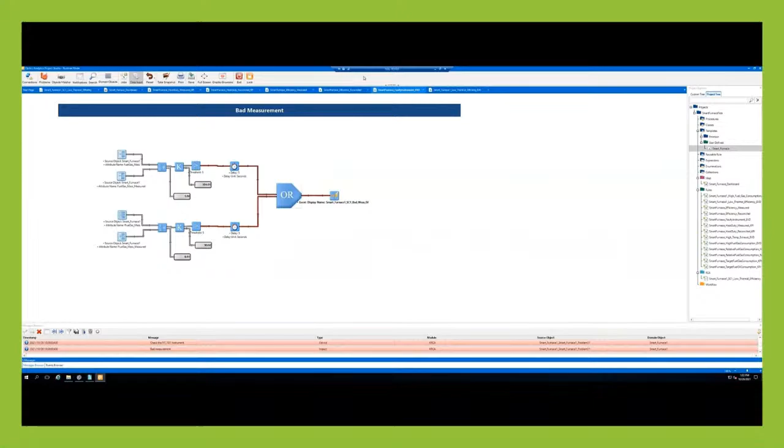Back to you, Michael. All right, thank you so much, Vida. So as you see, there's some definite value and also some ease of use in combining optics, analytics, and Sigmafine.

But you showed just one use case, these are really the main use cases that you get from combining these two technologies of analytics and something like Sigmafine. So really just knowing that you have trusted data.

Here you have the plant data. We take in information in our server, but that layer in between really can do things like data conditioning. It opens up a world of new use cases like custody transfer or reporting.

And really looking to take what you've learned from analytics and drive action. So being able to have a visualization and a dashboard that quickly shows what you can see from a reconciled perspective versus a non-reconciled perspective, having root cause analysis, actionable advice that can really take your learnings and make sure operations can do something about it.

And here, really what we're super interested in is how to improve sustainability, leveraging something like Sigmafine to really optimize processes, reduce energy emissions, and eliminate losses as we all look to become more sustainable.

Let's take a look at this first video, in which we want to show you how different data visualizations can now work together in a coordinated and integrated way, thanks to the interoperability offered by SFHub. We want to demonstrate the interoperability of SigmafineHub applications, which is their ability to use the same features available from the visualizer display, even using a different data rendering mechanism, which in our case is a report.

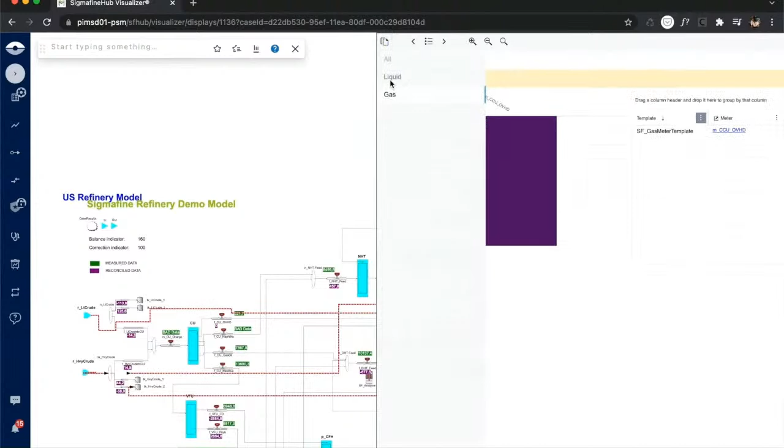Here you can see a display which also has a report that I have activated from the command bar of the visualizer. The report shows the meters test 1 performance indicator, providing a graphical and tabular view of our information, allowing us to interact with the display. The report gives us standard filtering options on the meter template, as well as the possibility to organize our data into multiple pages.

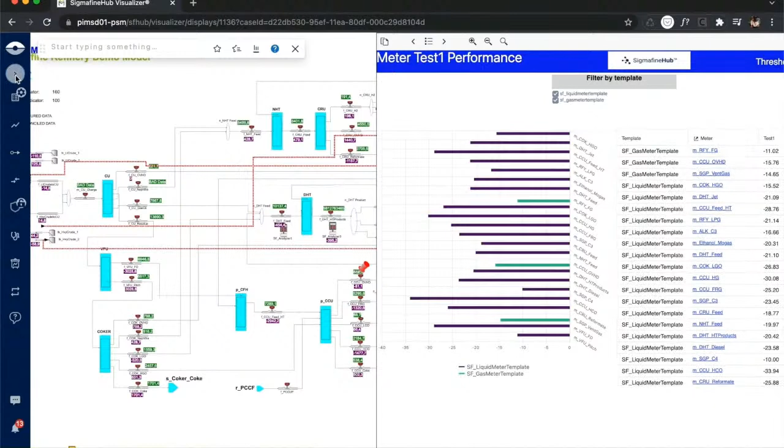Using only the report, we have all the full options, such as navigating on the display elements, viewing information contained in their attributes, and even more, we can adjust attribute values through the attribute panel.

The Sigmafine case runner is also available to run the reconciliation. As you can see, as a result of changes on the Sigmafine case, the report data is not valid. The notification message is reminding me that I must refresh the data. In future releases, a setting will be made available to allow automatic data updating.

To wrap things up, we can say that with SigmafineHub, we have the advantage of being able to work using our preferred approach without losing the functions available on the system, as well as exploiting the interoperability between the applications themselves. But how easy is it to use the new applications?

Let's see in this second video. The scope of this video is to demonstrate how easy it is to modify a report or a dashboard, taking advantage of the integration between the report and the report editor to make the desired changes and immediately evaluate the results. By opening a report from the visualizer, we can activate the report editor to make graphical changes.

The report editor opens and then we can modify the report by adding new content, such as a data grid, and then assign a data source from which to pull the data.

Configure an action on the meter column that allows locating the element on the display, and then add a relation between the chart and the data grid in order to enable the lookup.

The last change is to add an image of the company and then save the report.

Once the report changes are saved, we can open it again from the visualizer and see the results of the changes made. The lookup between the two visuals is working, and the meter localization on display is working as expected.

We have just seen how the new web apps provide an incredible new experience, allowing users to work with Sigmafine by freely choosing the preferred mode: display only, dashboard report only, or integrated display and dashboard report.

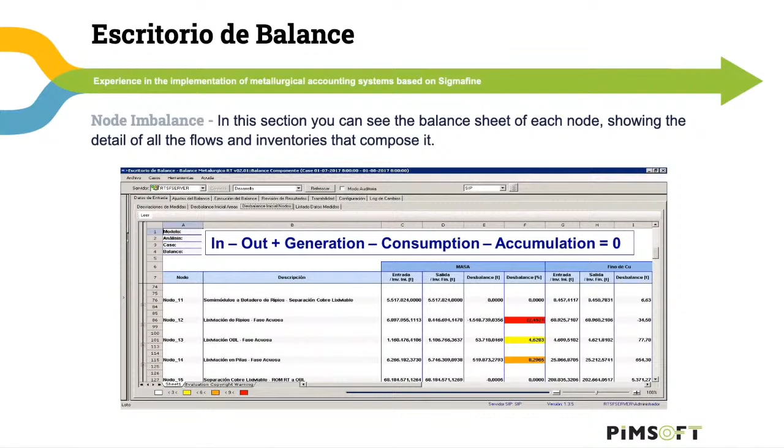Once the data has been reviewed, the tolerance must be loaded. Here, el escritorio de balance allows us to read the tolerance loaded in the previous case, review and modify it if necessary, and then write this validated set to the respective case to be executed. It is not the focus of this presentation, but I'd like to point out there is an option for automatic tolerance calculation using the variogram technique.

As I mentioned before, el escritorio de balance centralizes the balance tasks. Here, the input data collection, the balance execution, and the publication of results are performed. In order to be prepared for future audits, every time a balance case is run, it is necessary to enter a comment that facilitates traceability of the execution.

Once the balance has been performed, the results are reviewed. There are several functionalities here, for example the review of over-adjustment, which, as in the previous case, alarms with a color code the flows that are adjusted beyond the assigned tolerance. Here you can see a flow alarmed in yellow because it had an adjustment about 1.8 times greater than its tolerance.

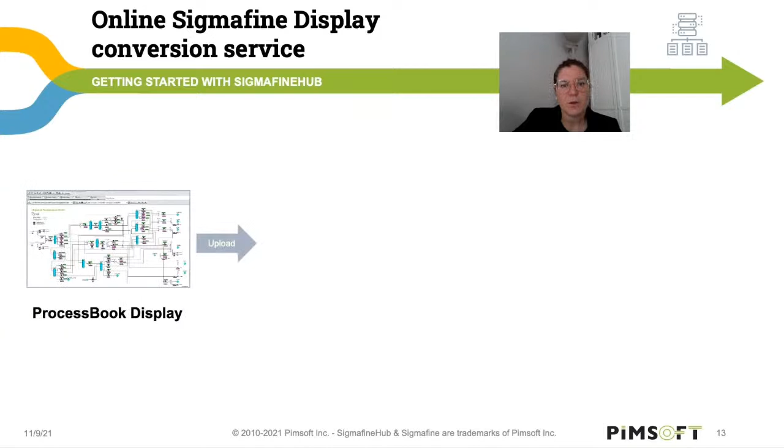The PDI files need to be loaded into the SigmafineHub site, where they will be converted. When the conversion is over, a message will be sent to the user, who will then be able to download the converted file and load it into the new SigmafineHub server of his company. After that, the user will be ready to work with it.

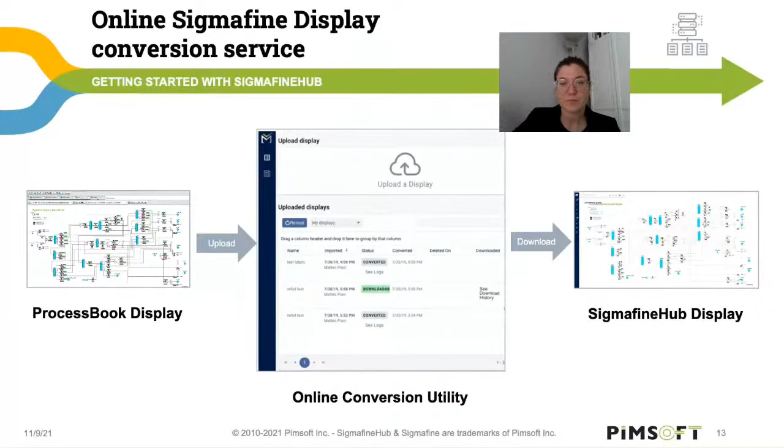Once the displays have been converted and are available in SigmafineHub, the only missing step is the onboarding of the user. Here are some of the key actions that the user can do with SigmafineHub.

First, create and manage job users using the SigmafineHub admin web app. Then, register on the Sigmafine support site. As we said, only users with permission will be able to access SigmafineHub and work with models. They can explore the resources of the Sigmafine support site.

They can convert the Sigmafine displays, and after the conversion, the displays can be imported into the new SigmafineHub system and used to run the Sigmafine models.

All the basic Sigmafine operations, collect element, collect transfer, collect input, run, and publish, will be performed through the visualizer. All the new features of the Sigmafine visualizer will be available, as well as the functionalities and tricks that can improve the user experience and save time during the balance analysis.

The SigmafineHub installation service package allows you to get SigmafineHub completely installed by Pimsoft remotely. Even if SigmafineHub installation can be easily performed by the customer, you may need to speed up the process.

The installation package includes all the installation steps, from the pre-installation assessment to the test of the client connections. Depending on the case, the installation phase can be performed completely by Pimsoft with the customer IT support, or partially by Pimsoft and partially by the customer IT, depending on the permissions that are given to Pimsoft.